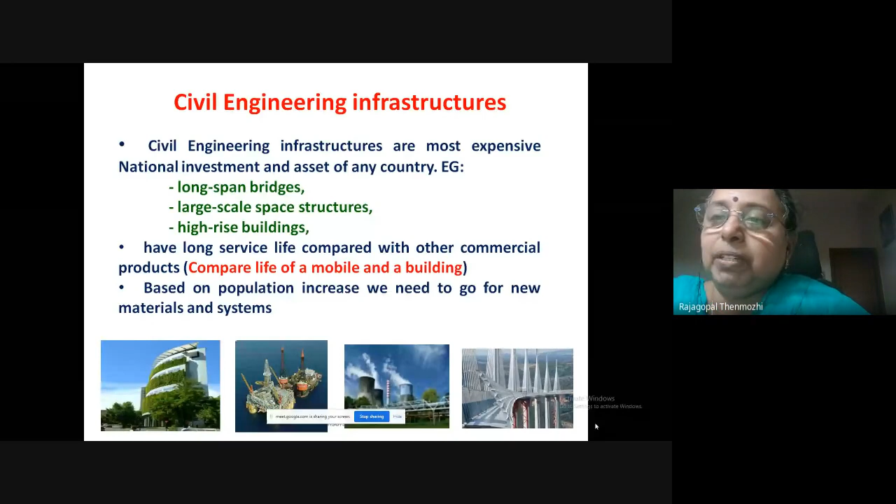So for these kinds of structures, we are having it today, and it is the need of the hour also, because, you know, compare the population of Tamil Nadu and India some 50 years back and today. Every year we are having a mushroom growth, an exponential increase in the population. So for each and every increase in population, we have to satisfy the norms for that individual. He needs a good or decent house for living.

And for that man or woman, we have to provide the roads for transport, and he needs all kinds of commercial things, and all kinds of infrastructure like road, railway, airport, and other things. And he needs the religious temple, like that. All these things we need to provide in addition to the lifeline basic services like water and electricity, etc. So these are important infrastructure needs as far as the people are concerned.

So you can just compare the life of a mobile and a building. The mobile is available from 1,000 or 2,000 onwards till lakhs, and even beyond a lakh. But you cannot construct a building for a lakh. Even one room or one component of that building is not at all possible. So we have to keenly depend on the construction activity, and we have to bother about the type of material we are choosing and the type of technology or system we are adopting, because it is going to last long.

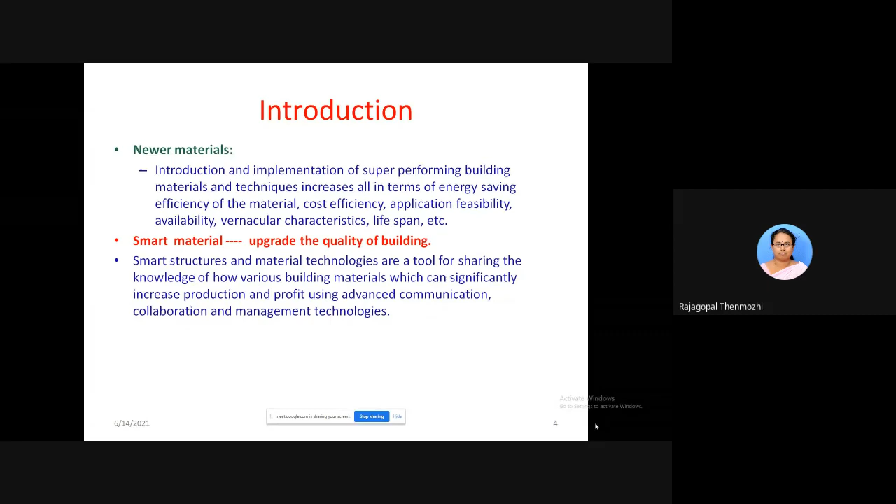So coming over to the materials side, I call these super performing materials. A super performing material is a material which can perform in these ways. It can save the overall building energy, which is the talk of the day now. That's why I have put it in green color; we always need everything in a go green manner. The second thing is you want it to be pleasant enough, so you want to make the building aesthetically pleasing.

And the engineer's vision always has one main thing, the economy point of view. We want everything in economical mode. We don't want to dump our money as a dead load in the building, so we want to cut cost in all things. And the material should be easily available, and you should not disturb nature a lot.

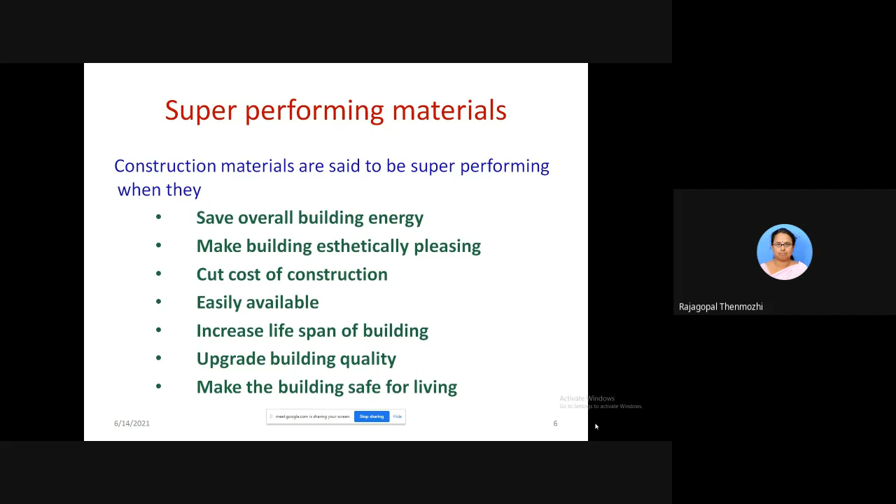At the same time, the building should survive for a long time, so its life should be more. Similarly, you should upgrade the building quality and make the building safe for living. These are the things a building material should satisfy. So in that sense, I have charted out these kinds of materials, which of course you know already. Nowadays in India these materials are in practice, but foreign countries have gone a lot further; these materials have been in practice there for the past two decades.

So we have durable concrete, because we want to expose it in certain situations to aggressive environments, and there also it should perform well. Similarly, high performance concrete. We are not going only with 2-story, 3-story or 4-story buildings. In Mumbai, Delhi or Calcutta we don't have any space, so to meet the population demand we have to go for skyscrapers or tall buildings.

If you want to construct a 40-storied or 60-storied building, your M15 or M20 grade will never do, because we want a slender construction also. If you make the grade of concrete higher, the strength will be higher, so your section will be smaller, and the load going to the foundation will also be lesser. In that case you can choose high performance concrete, not only to make a slender section but also performance wise.

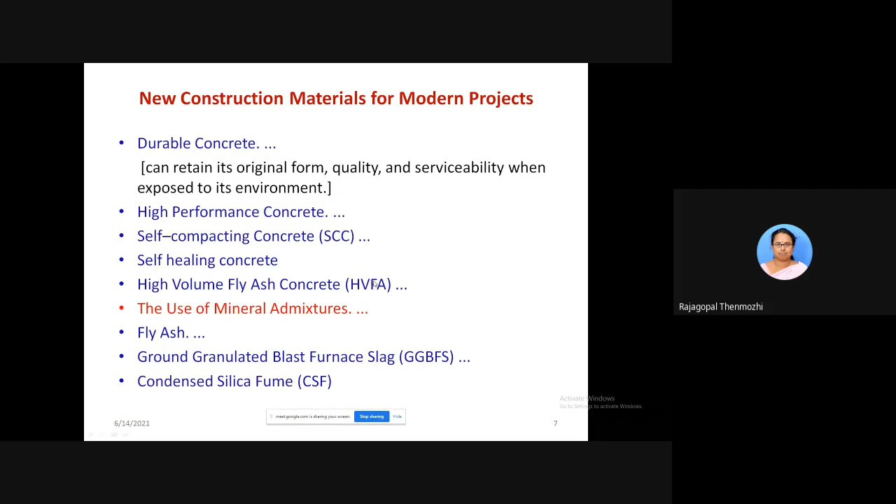So instead of using only normal RCC or normal pre-stressed concrete, people have started using these kinds of concrete in various projects to save money and to reduce the pollution. So this is what I want to mention in this slide.

In the cement and concrete industry, cement manufacturing releases 800 kg of carbon dioxide per ton of cement. Around 60% results from the chemical reaction of limestone, which everyone knows, and the balance nearly 40% is from burning of fuels, and less than 5% is from electrical energy.

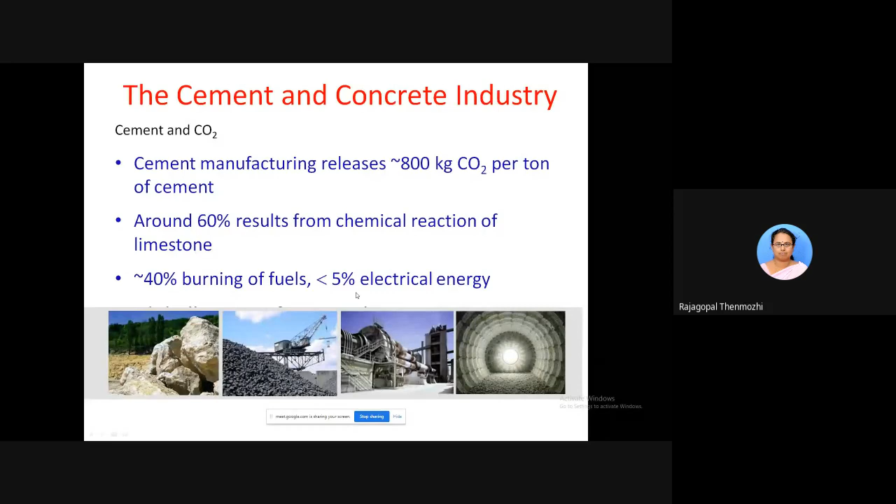So we want to replace the clinker, because clinker manufacturing alone accounts for 90% of fuel and energy consumption, which leads to heavy emissions also. This can be partly substituted by latent hydraulic or pozzolanic materials like blast furnace slag from the steel industry, fly ash from coal-fired power plants, and natural and artificial pozzolans.

There are so many pozzolanic binders from waste materials people have started using, which you may also know about. All the participants, I hope, are faculty members, so you may be guiding projects for 8th semester or PG students using supplementary cementitious materials. There is a wide range of composite cements covered by the European standards.

So what I would like to conclude is there are three main pathways successfully applied in the cement industry, enabled through R&D and innovations in engineering technology and material science, because we should know the physics and chemistry of supplementary cementitious materials. Based on that, so many materials have evolved.

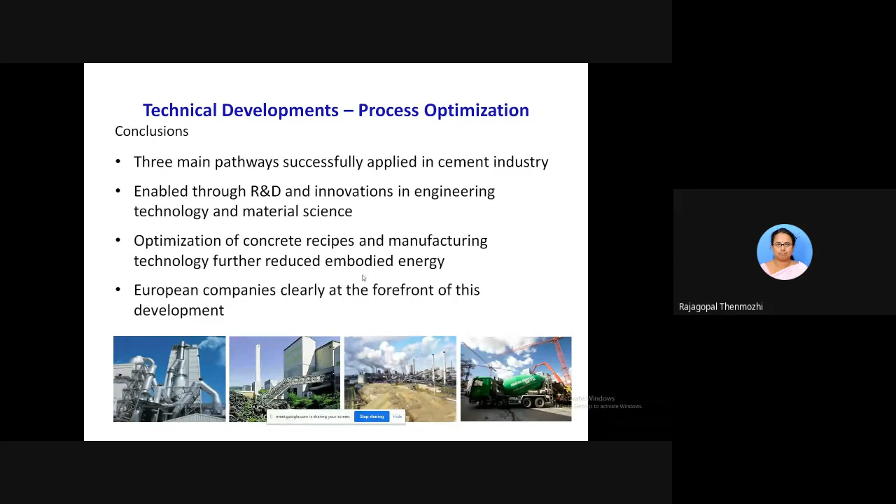So based on that, we have got these kinds of different types of concrete: fly ash concrete, high volume fly ash concrete, geopolymer concrete, bagasse ash concrete, rubberized concrete. Like that, there are so many sustainable concretes using the wastage materials from different industries. We are making it as a supplementary for the binders. Partly we are replacing for a binder, right? So that the cement consumption may be lesser. Once cement consumption is lesser, we can save the cement, we can reduce the cement production also.

Yes. So as a second material, right? In these slides I have mentioned about the concrete which is based on the different kinds of materials. So fly ash is the industrial waste, and fly ash concrete, high volume fly ash concrete, and geopolymer concrete, all these things can be based on the industrial waste fly ash. And bagasse ash is nothing but the sugarcane waste, right? So you will just crush it and you have to burn it, and that ash can be used for the replacement of cement. There are many researches going on using this bagasse ash.

And similarly, rubberized concrete. You can find a lot of materials are available as far as the rubbers are concerned, right? Literally, see in a town, how many vehicles are passing? Can you please think of it? If you just see the town hall area in a bird's eye view manner, there are so many four-wheelers and two-wheelers daily traveling. Of course, avoid this lockdown period. In the festive season or other seasons we are seeing so many vehicles. So just think of the life of the wheels of the vehicle. Can it go for 50 years or 60 years or till your life ends? No, not at all. So it has a limited lifespan.

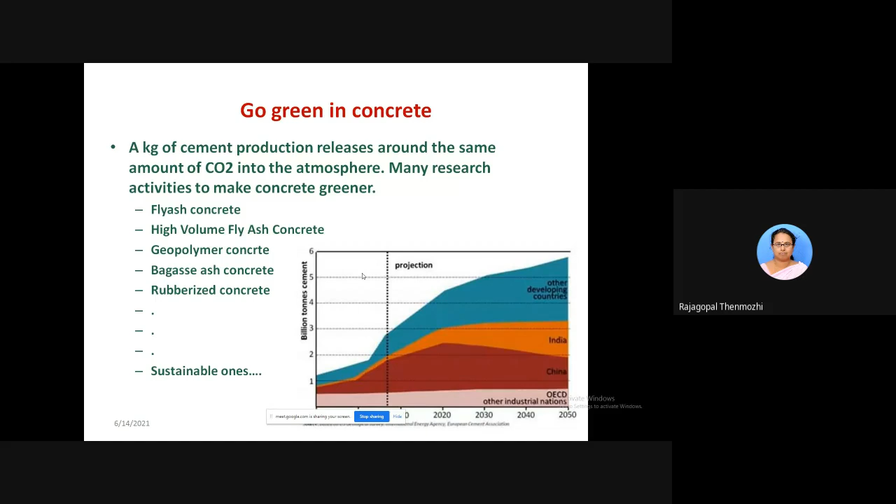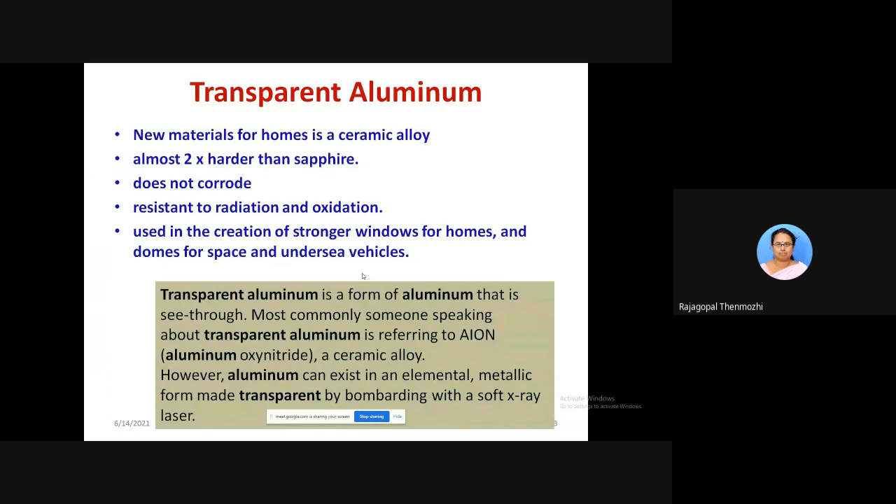And what are the other materials you have in the world? Coming over to the next one, the transparent aluminum. Many of you might have heard about this also. It is nothing but a ceramic alloy. It is a form of aluminum only. It is transparent, as the name indicates, a see-through one. It is almost two times harder than sapphire, it has no corrosion, and it can resist more radiation and oxidation also. This kind of aluminum can be best utilized in the creation of stronger windows for homes, domes for space elements, and undersea vehicles. There are so many space construction elements, and for those you could utilize this, as it is strong enough to act as the member there.

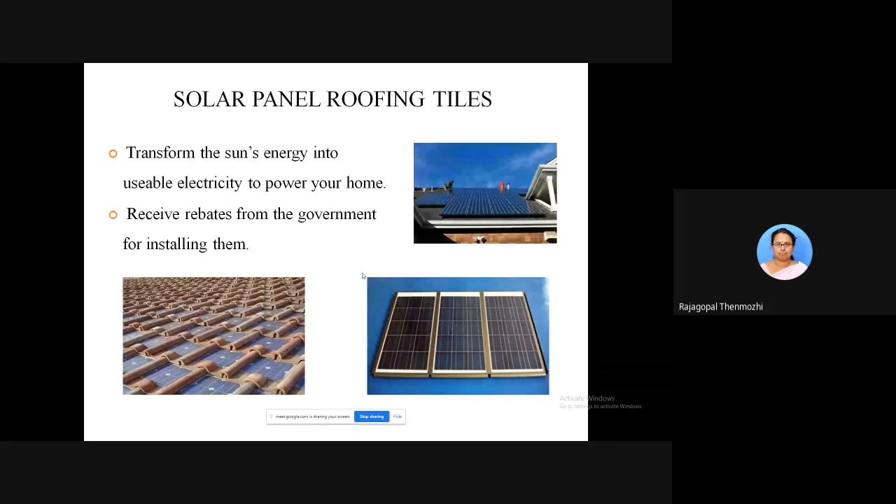And either you can utilize that for pumping, for your water heater, or somewhere else. That is a different thing. But now the tiles themselves have been manufactured using this kind of system, in the same way as the solar street lamps you are seeing in the streets.

And another thing is CLT, which is nothing but cross-laminated timber. Right? So, of course, 3 to 11 wooden layers will be there. CLT can consist of many wooden layers which are glued together to form a solid panel. Its thickness normally varies from 50 to 300, say 60 to 320 mm, something like that.

And it is normally used mainly for low-rise residential buildings and commercial complexes, and for mixed applications also, say for temple-like structures and other buildings. But now, you may wonder, it has started to find applications in the construction of tall buildings and skyscrapers in foreign countries, because it is a sustainable and resilient form of engineered wood.

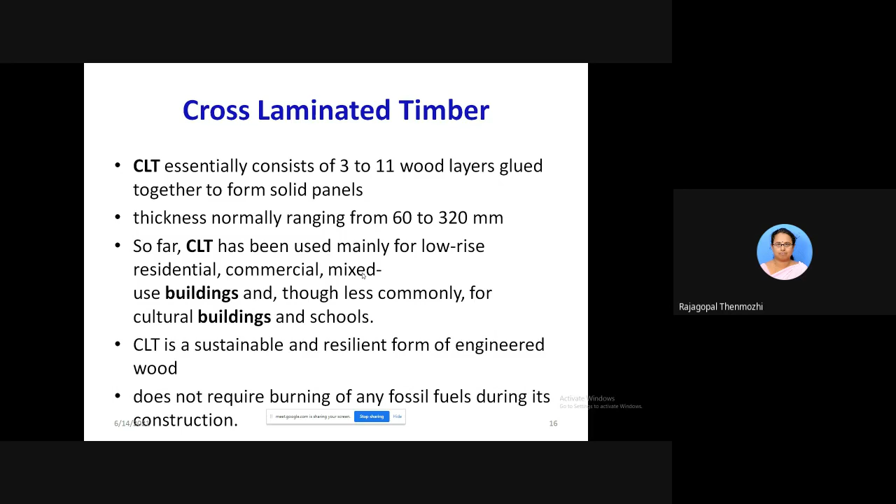Suppose you take Japan or other countries which are quite often subjected to earthquakes. In those places you may find more wooden construction, so in those areas this may find more application. And this does not require burning of any fossil fuels during its construction.

Of course, the initial cost will be higher, but the final overall cost will be lesser, so you could save something. Because of its natural-looking aesthetics and strength, designers and builders are now coming up with the usage of CLT even for tall buildings. The architects have started to use it a lot.

And see, this is one example of CLT. This is a 34-meter long and 3-meter wide upside-down double cantilever structure. The wonder is that it is a double cantilever structure. This is a public art pavilion at Chelsea College in London.

Ma'am? Yes. I'm sorry for disturbing you, ma'am. In your slide you're showing a small dialog box. Please press the hide button, it's in the lower corner. Some topics are not showing. Please press your hide button. Okay, this one? Yes, ma'am. Okay. Please proceed, ma'am.

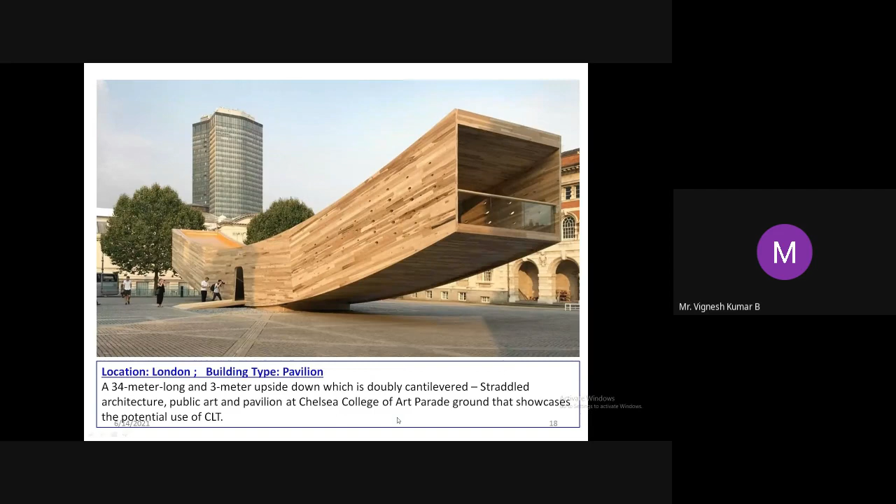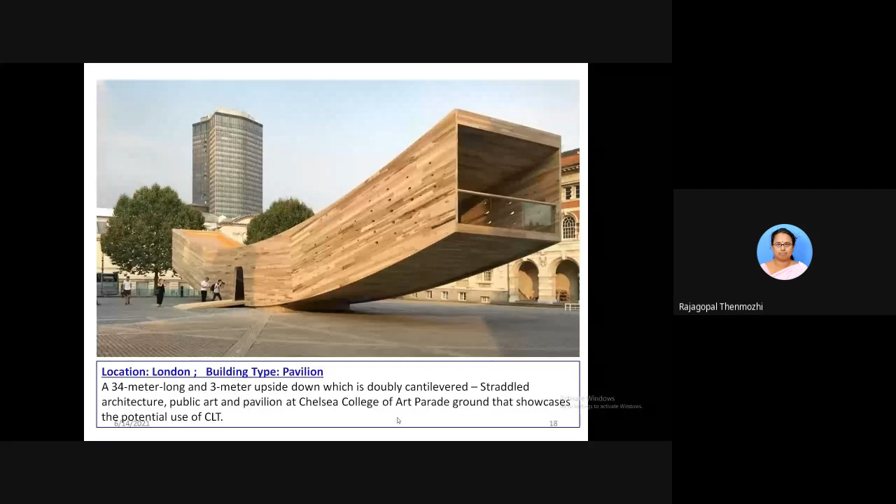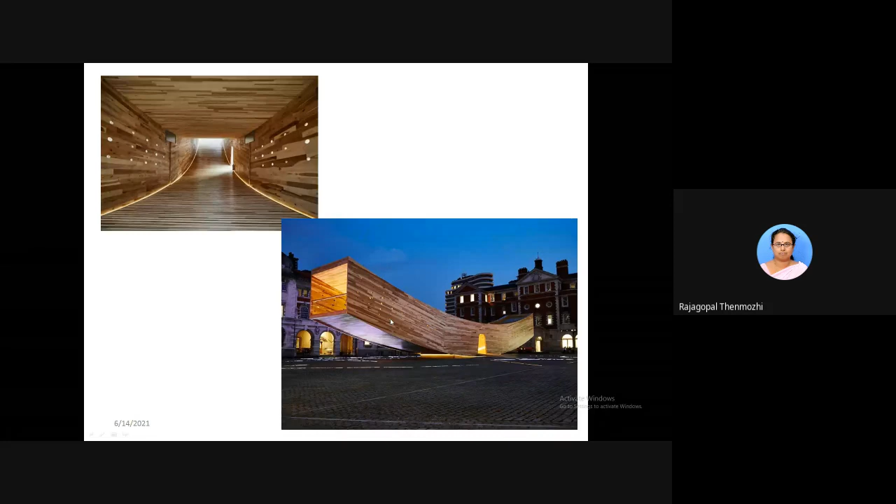Okay, so this is one example, this pavilion building, a double cantilever building made completely of CLT. And this is another view of the same structure. The first one is the inner view of the cantilevered structure, and this is the entire structural element, shown in a photo taken from another angle.

And of course, many of you know about rammed earth, because in villages many constructions use it. Nowadays some foreign countries, where rammed earth is available a lot, have this kind of construction. Normally they compress it in wooden boxes, and it is compressed in layers of earth, sand, clay, and fiber.

So how is this made? The solid material is filled with pores, up to 90-95% of the volume can be voids. It can consist of gas-filled voids in two different kinds of structure: either stochastic/reticulated, or regular stacked cell. Depending on the density, structure, and shapes of the cavities, this can be divided into two types - the stochastic form and the regular form.

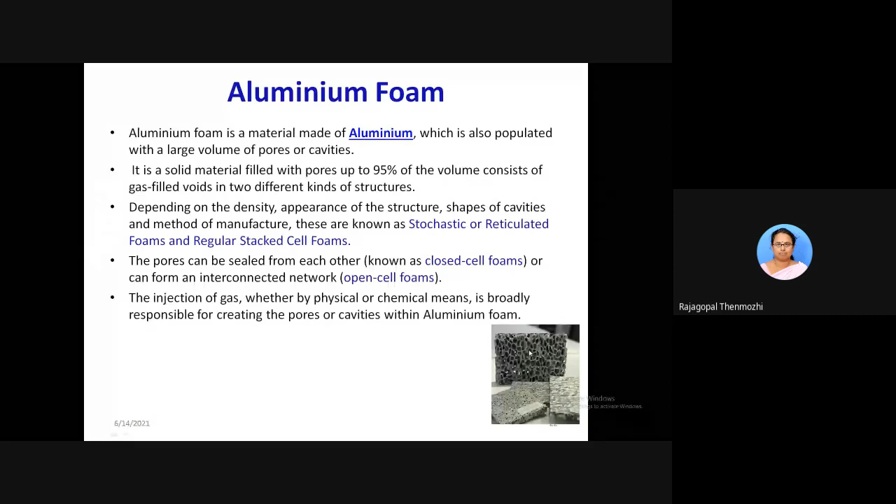So it is really a wonderful and excellent material which can deform in a lesser way alone. These are the different properties of aluminum foam - it is extremely durable and very lightweight. You can see there are so many voids around, and these voids are filled up by gas cells, giving it a very large surface area to volume ratio.

This non-flammable material inherits all these excellent properties. Aluminum, which we use in the kitchen, has a large secondary value because it can be recycled, so aluminum foam can also be recyclable. It has good heat and corrosion resistance, and huge strength because of the air gap voids filled by gases, which together as a foam element gives much strength.

Fortunately, the electrical and thermal conductivity of the foam is good, and the weight is very lesser - because of the weight of aluminum combined with that foam structure, it's only a fraction. It also has a high specific stiffness, that's why it can withstand greater damage with very little deformation.

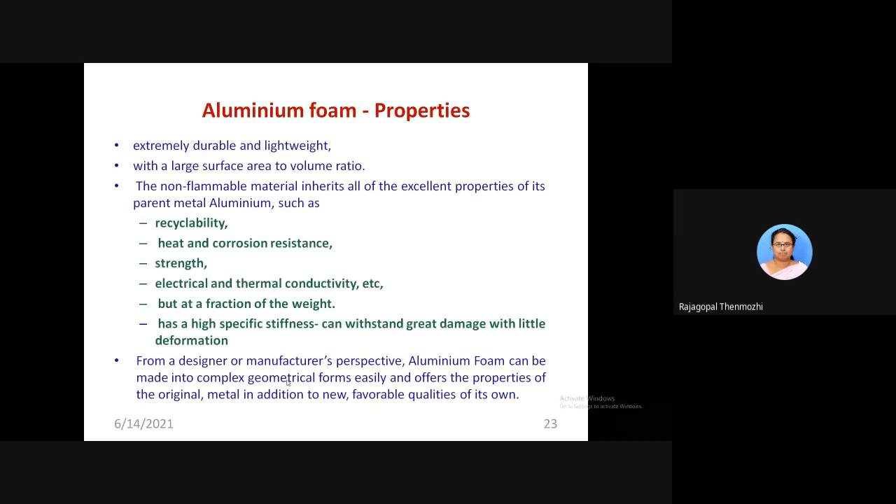From the designer's or manufacturer's point of view, aluminum foam can be made into a complex form, any kind of geometry easily, and it offers good properties, making it favorable for the construction industry. Many industries utilize this aluminum foam, like automotive, aerospace, and construction.

The automotive industry uses it for good impact, acoustic, and vibration absorption. In the aerospace industry, people use it for making turbine components or spatial cones. As far as our industry is concerned, since this material is fireproof and heat-proof, it serves as a structural and protective barrier against explosions or heavy sound, as well as in the naval industry.

This plays a vital role in shades and shadows, bringing identity to the structure. A number of automotive and aircraft manufacturers consistently utilize this aluminum foam mainly because it has a good high strength to weight ratio.

Strength to weight ratio is very, very large because the weight is very, very lesser. So it has a very good amount of high strength. So automatically the weight going to the foundation will be very, very lesser.

So utilizing this aluminum foam, you can make it into a column also. People have started this as one research area. You are having a tubular hollow formed steel or mild steel element, in which you can pour this aluminum foam, and you could find the value of the column element, how much load it can take.

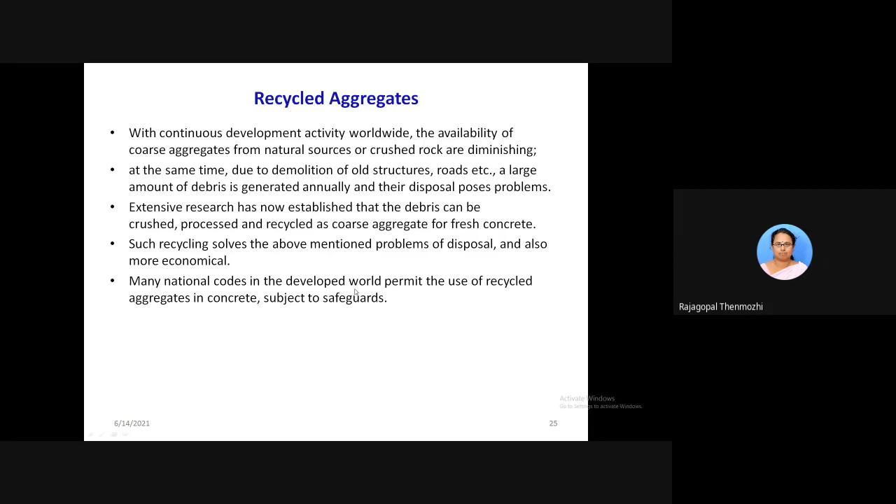And the other type of aggregate is the lightweight aggregate. I hope you also heard of this one. Because nowadays, if we are just depleting all the natural resources, in a short duration everything will be gone, and we will not be in a condition to get all these things. So in such a case, we have to go for man-made aggregates. Man-made aggregates, in the sense, there are a lot of waste materials or industrial wastes available.

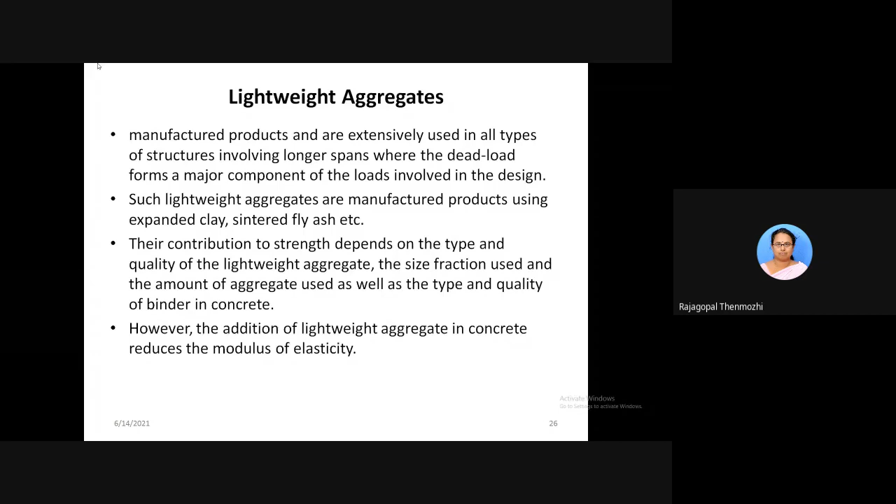From industrial waste, you could manufacture lightweight aggregate. If you're making an aggregate that gives you lightweight, automatically the load on the foundation is lesser, so you save material and make the structure more economical. Such lightweight aggregates include sintered fly ash aggregate using fly ash, and expanded clay using clay. There are so many other industrial wastes too, giving you many lightweight aggregates used in practice.

So what we've seen are certain materials. I just want to throw light on this: workshops like this will not give you the entire knowledge about the system. Through these kinds of programs, you get to know the title or some information about it, but it should be your interest to get more knowledge about the thing, so that afterward you can Google it and find out more about whichever system you want to know more about.

Coming over to innovative construction systems, there are a lot of things available. I just want to mention 7 different systems: self-healing concrete, 3D printing, diagrid structures, outriggers in super tall buildings, photovoltaic glazings, modular construction, and cloud collaboration. How many of you know about these words?

Of course, many of you know about self-healing and 3D printing, am I right? Please... Any answers? Have you heard of these words? If you're replying something, then I could understand something.

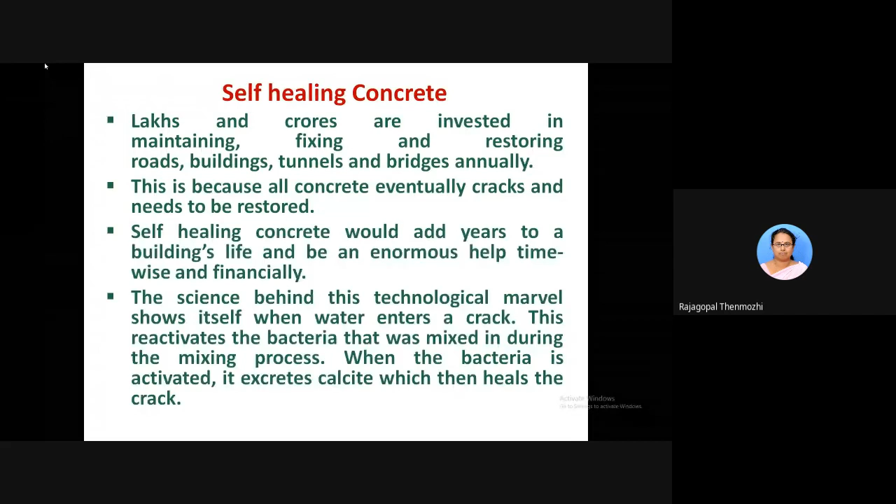The science behind this technological marvel is that when water enters a crack, it reactivates the bacteria mixed with the concrete during the mixing period itself. When the bacteria is activated, it excretes calcite, which then heals the crack. So this is how the mechanism works—the concrete is engineered with water-activated bacteria, which heal the crack by producing calcite.

So self-healing concrete is saving contractors and engineers a lot of time and labor. By using this type of concrete, you reduce infrastructure maintenance and reduce the production of greenhouse gases, which everyone knows. Simply put, the structures can last for 200 years—2 centuries it can go.

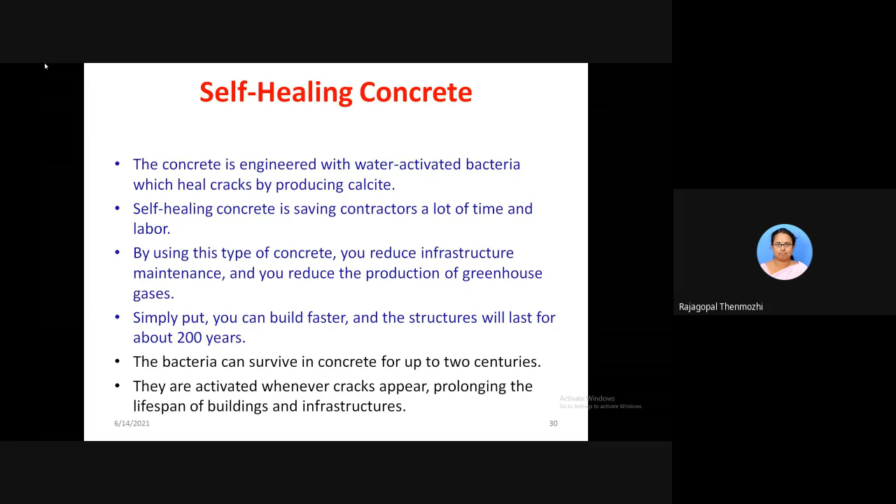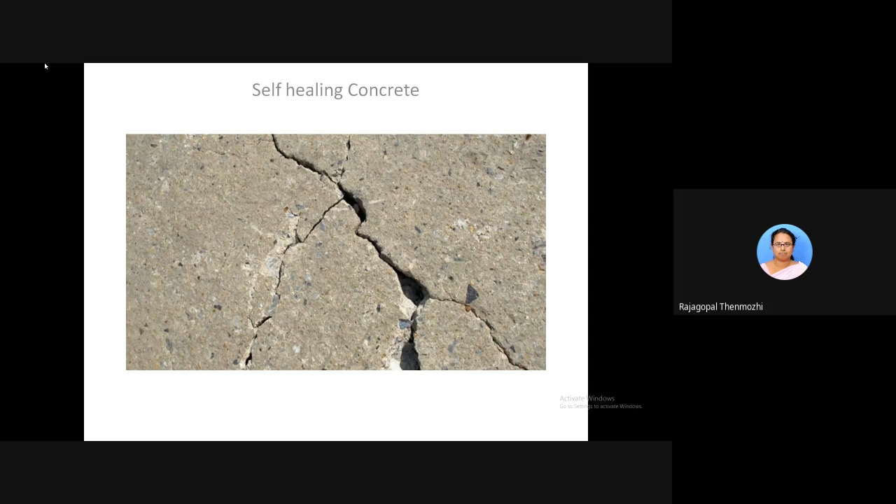So they are activated whenever the cracks appear, prolonging the lifespan of infrastructure. This is the way self-healing concrete works. Right? So these kinds of cracks we do not want to see, right? So once it opens, it just triggers. Up to this kind of width we need not permit, right? So if it just started to show a micro crack itself, this bacteria will just open up and it will excrete the calcite, so it will automatically close. So that will be the job of the self-healing concrete if you are using it.

Yes, coming over to the 3D printing. 3D printers everyone knows, right? It is the talk of the day. This is used in construction to create components or structural elements, printing directly at the site, just as printing technology is used in mechanical production or other machinery production everywhere.

Suppose you just take a vessel in your house, a kitchen vessel, simply a plate or spoon, how they are manufactured. The similar way your house is going to be built. Similar way you are going to manufacture your house. In the same way you are going to print your building. So that's called 3D printing.

That machine is normally housed within the industry itself, but this machine will have a large arm and other kinds of machines, many robots. So the machinery itself is a huge thing. And today we have all the design process intact, everything given in soft form. And the industry is also experienced in computer-aided manufacturing for the past 2 decades. And there are so many advancements, like building information modeling, which further facilitate greater use. So 3D printing construction may allow faster and more accurate construction.

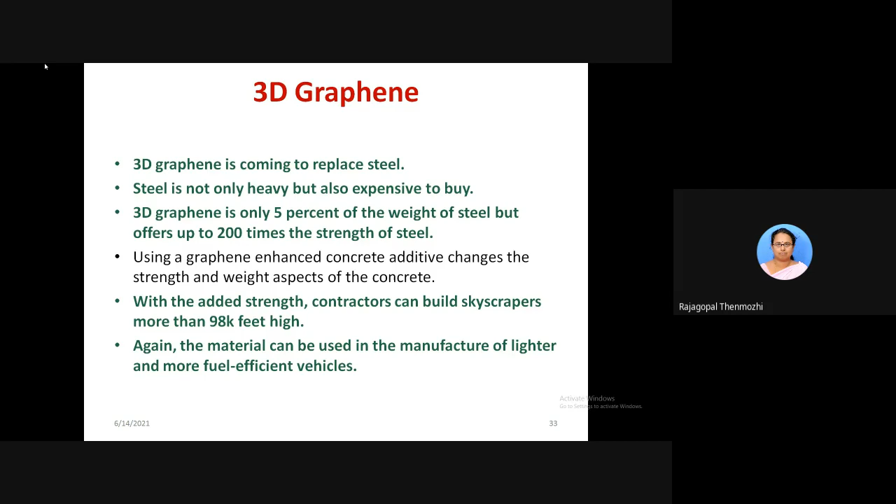With this added strength, contractors could build skyscrapers even 98,000 feet high. The material can also be used to manufacture lighter and more fuel-efficient vehicles. Nowadays graphene is used in 3D printing concrete, and we have mobile 3D printers. Adding graphene to a material makes it stronger, durable, lighter, more elastic, and resistant to cracks. This improves the antibacterial and thermal properties of the material.

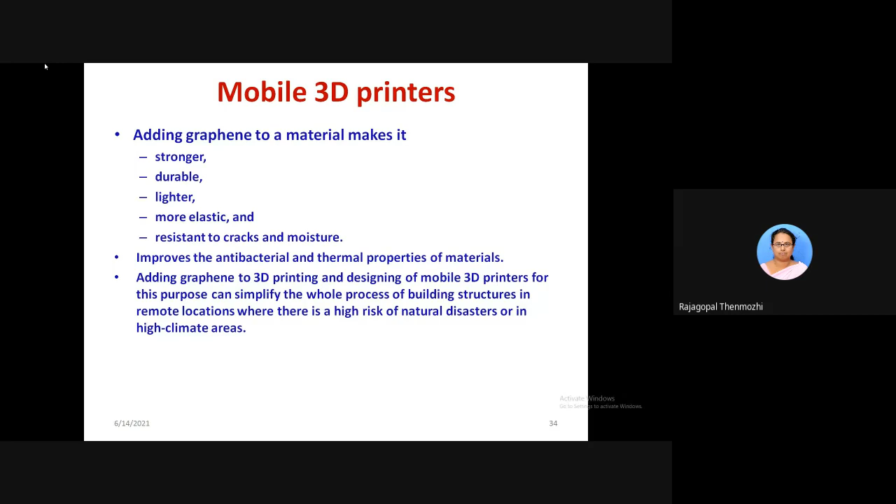So adding graphene to 3D printing and designing mobile 3D printers for this purpose can simplify the entire process of building structures in remote locations with heavy risk from natural disasters and in harsh climate areas. So these are the benefits. Aside from the environmental benefits of 3D printing, there are other advantages we get from this material.

Mainly it saves time and labor. If you want to do a particular job in 2 weeks time, that can be finished within 3 to 4 days itself. So see how much time you are saving. On top of that, the risk of injury on site dramatically drops.

Someone is asking what the main topic for today's session is, ma'am. So I only posted. Which one? Who is that participant? What is your question here? So it's Muhammad sir. I think Muhammad sir is asking the question, ma'am. So what is the main topic? Yeah, the topic is innovative concrete materials and systems. Yes, what is the doubt you have, Muhammad Ashfaq Khan? So if you have any queries, you can post.

And my topic here is innovative concrete materials and systems, because these are new areas of research which are not yet completed but have come into existence in practice in other countries. Okay, that's what I am talking about. There are so many research avenues, because we do not yet have the codal provision for this 3D concrete printing. And we are using only concrete. There are a lot of materials that can be used for that. So whenever you are using another material, we need supportive information through R&D. Once the R&D is completed, only then can we have the codal provision, and then we can use it in a proper manner.

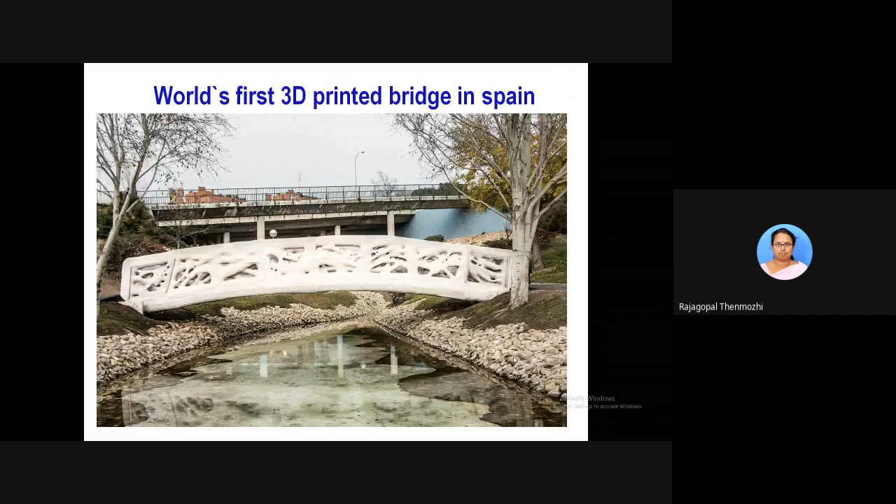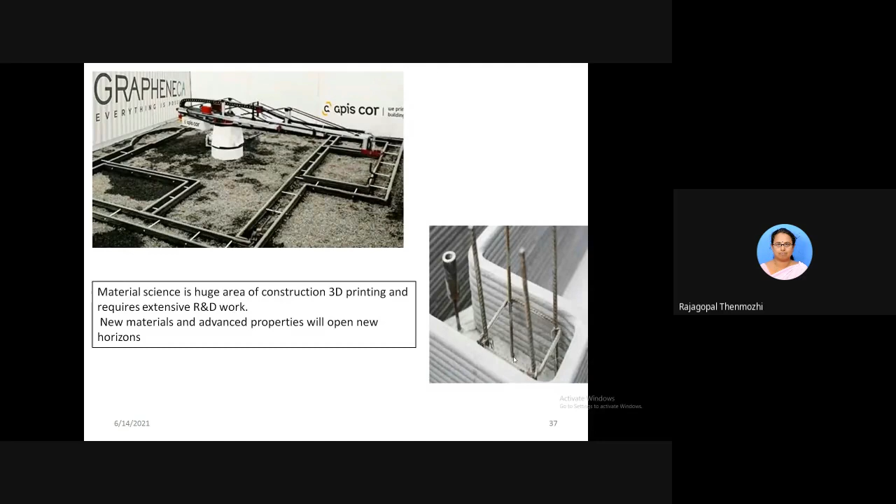And this is the world's first 3D printed bridge in Spain. Some of you may have heard of it. A very nice bridge, directly printed and erected at site. And this is how people will do it. Material science is a huge area; a lot of physics and chemistry should be learned. Automatically the lever arm will pour the concrete, and the house will be readily built. So that is the discussion about the 3D printed concrete system.

So recently, the use of perimeter diagonals: in layman's words, you are not going to provide vertical columns in the periphery; instead they will be connected diagonally. If you connect them diagonally, we call such a system a diagonal grid, so it is a diagrid. That's how the name comes. This structure is made up of diamond modules with diagonal members and provides more lateral stiffness. Can you think of how, instead of a vertical column, an inclined column can give more stiffness? Can any of you comment on this?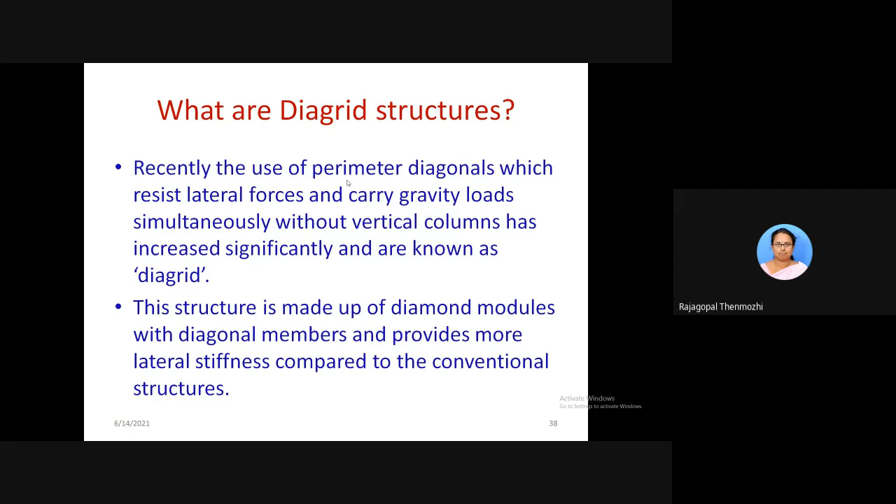Same structure, you model it through one of your students, right? Say for the next semester, 8th semester students, you can give a project, either a G+5 or G+10-storied building. One is based on RCC with regular conventional type of construction. And the same thing you ask him to design by means of the diagrid. So how much material you are going to save there, you can judge. Definitely there will be an economical benefit of it.

And also this gives a pleasing appearance. So do you agree or not? Definitely, no? So instead of seeing the regular rectangular columns, this gives a good look, right? So high-rise buildings using diagrid structures are a trend today.

There are so many kinds of lateral load resisting systems for high-rise buildings, right? They are rigid frame, shear wall frame, braced tube system, outrigger systems, and tubes. Okay, so these are the various systems available, and recently this kind of diagrid structural system is adopted in tall buildings due to the structural efficiency and flexibility in architectural plan.

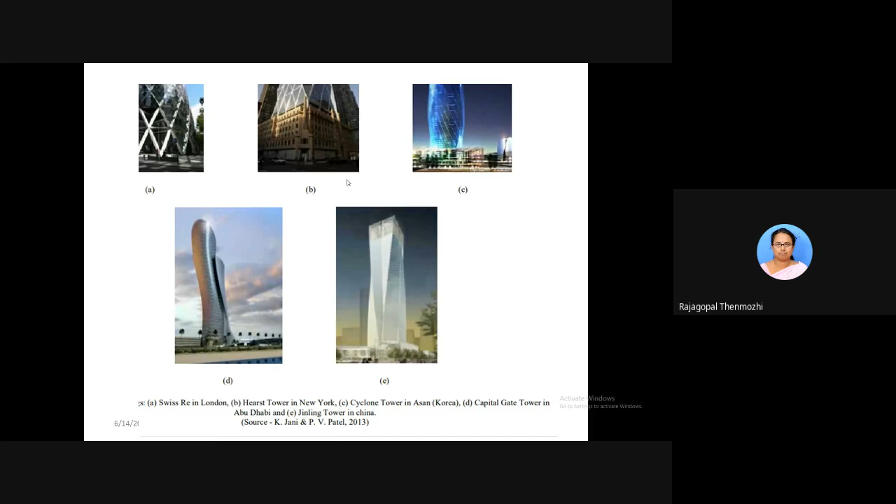This is one project for your final year students. Okay. Using a finite element approach in ETABS, that will be good, or even you can use STAAD Pro itself, right? Yes. So this is an example: a building in London designed using this kind of diagrid. And these are the other systems. There are so many places these kinds of buildings are available today, in Abu Dhabi, London, China, right? Everywhere.

So to avoid that, to disperse it, what people are doing now is, every 15th or 20th story, one big beam is provided. Outrigger is nothing but a very stiff beam, right? So that will be provided. The height of this outrigger beam may be up to 1 meter or even 1.5 meters. So the load from all these beams above will be taken care of by this heavy truss, right?

So for the remaining beams, you are able to reduce the size of the regular beam. See, in a 100-story building, you will have 100 regular beams. Suppose you are considering only one single frame, a 2D frame, right? So the weight of 100 beams may be much simplified, right?

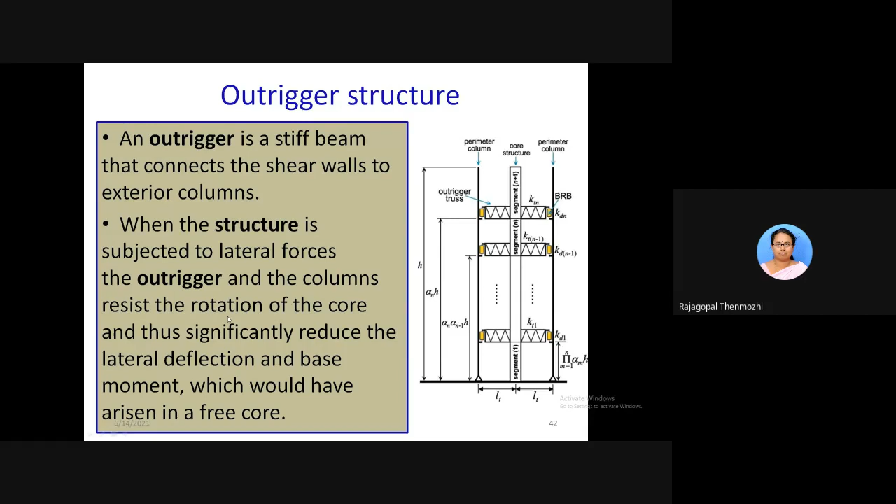So this is another picture. See here, these are the outrigger systems adopted in super tall buildings, right? So this is one outrigger, this is one outrigger. The lateral load resisted by a conventional building will be much higher. So by adopting this kind of system, these lateral loads can be taken care of by this particular element. So like that, you could see.

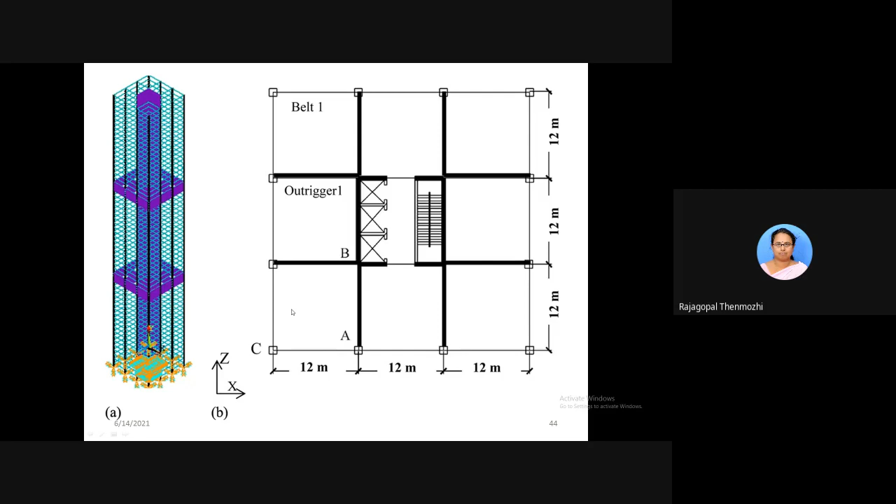Right? So this is the pictorial view of a 3D frame. At every 20th floor, one outrigger is placed here. So this is nothing but outrigger 1, outrigger 2. So this can take care of all the lateral and seismic loads and other kinds, so that the size of the beams in a 100-story building will be reduced.

So this is another picture which shows another outrigger. This could be either a steel-based truss or a composite truss or a heavy RC member in which a composite I-beam may be placed. So maybe you can also give this to your students as a project, so that you could also learn and the students could also develop this knowledge, right?

So you can ask them to provide a beam here using a steel truss, another using a concrete-encased composite structure, within which you provide a truss surrounded by concrete, and another one an RC beam with a laced and battened system as reinforcement. These three can be analyzed, and you can compare the cost of the building, the size and weight of the structure, the optimum weight of steel in each system. So all those are nice choices for a project.

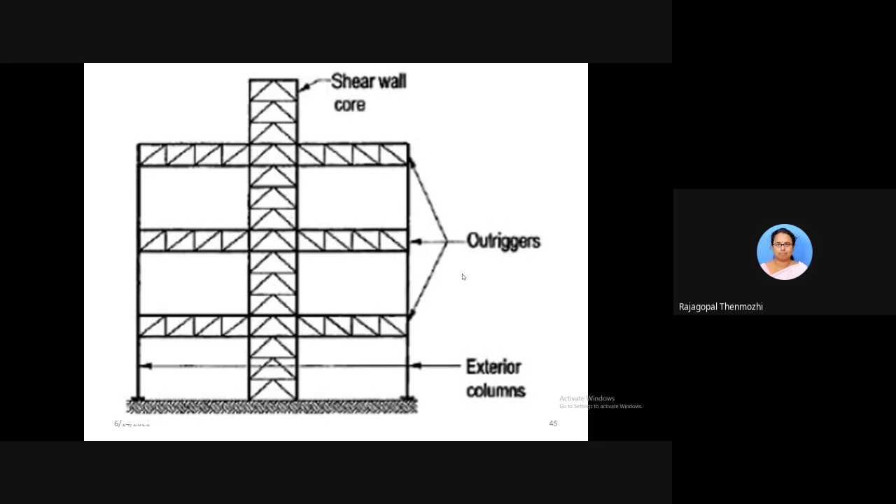This is also another eye opener from a research point of view. Not much research has gone on in these cases. This is again another picture which shows the outrigger trusses, or another way you can call this a belt.

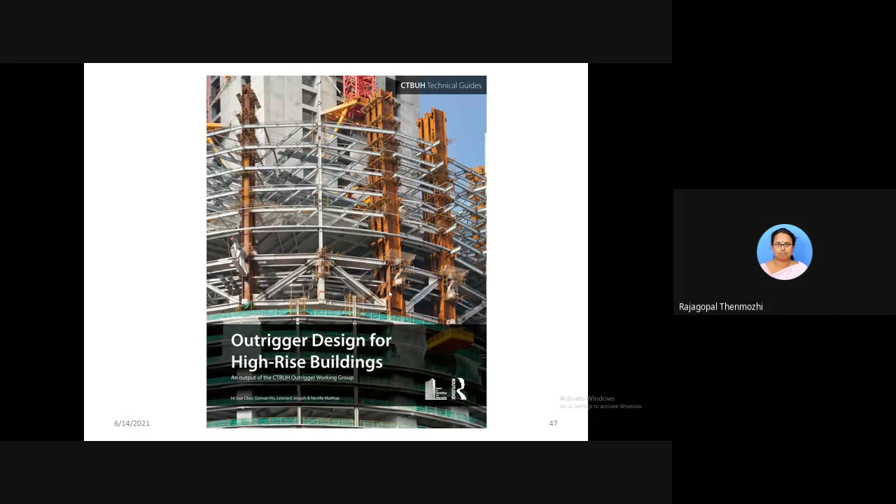This is again a real case of outrigger design for high-rise buildings. See, these are all smaller steel beams. This is the steel column, right? So here, this one is the outrigger. It is a kind of truss element, right? So your saving will be done there, right? So that completes my discussion about the outriggers.

So the next material is the photovoltaic glaze. Has anybody of you heard of this word, photovoltaic glaze? This is nothing but a building integrated with photovoltaic glazing, BIPV, right? What it does is generate electricity on its own. You wonder? Definitely, yeah. Some companies are manufacturing these kinds of glasses for windows, facades, and roofs, right?

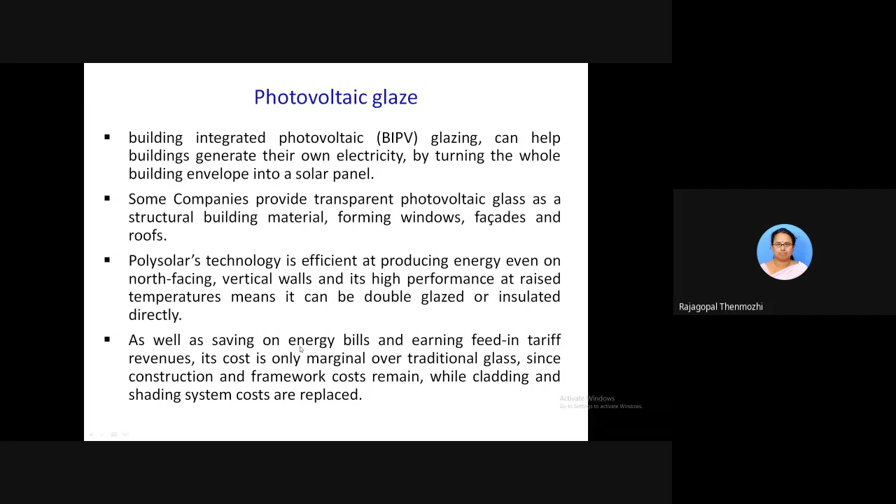Polysolar's technology is efficient at producing energy even on north-facing vertical walls, and its high performance at raised temperatures means it can be double glazed or insulated directly, right? As well as saving energy, you can save on the EB bill here. So how is it done? This is an example of a system. In foreign countries they have this kind of system. So BIPV acts as an enabler to adopt solar energy, right?

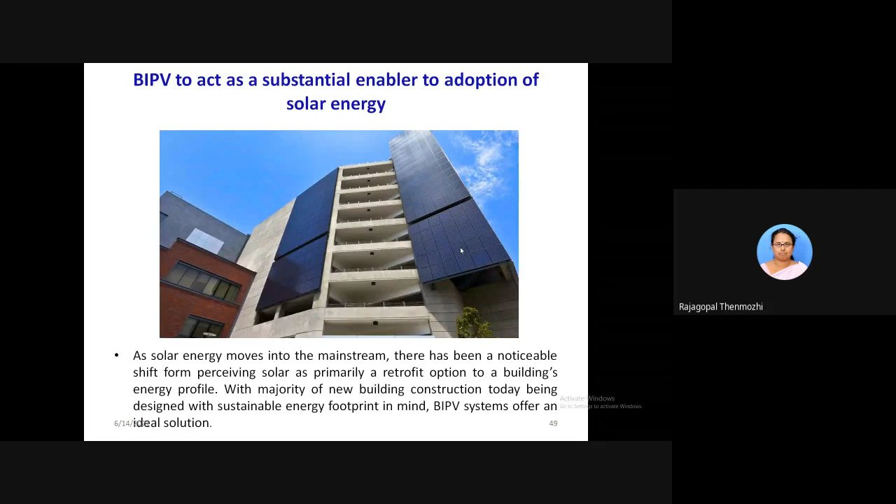And this is again another pictorial view. See, from the sun, these kinds of photovoltaic panels are fixed over the building roof, or glazing, or over the wall facade, anywhere, right? So this can absorb the energy, and it can convert it into AC or DC, and send it to the AC or DC inverter, right?

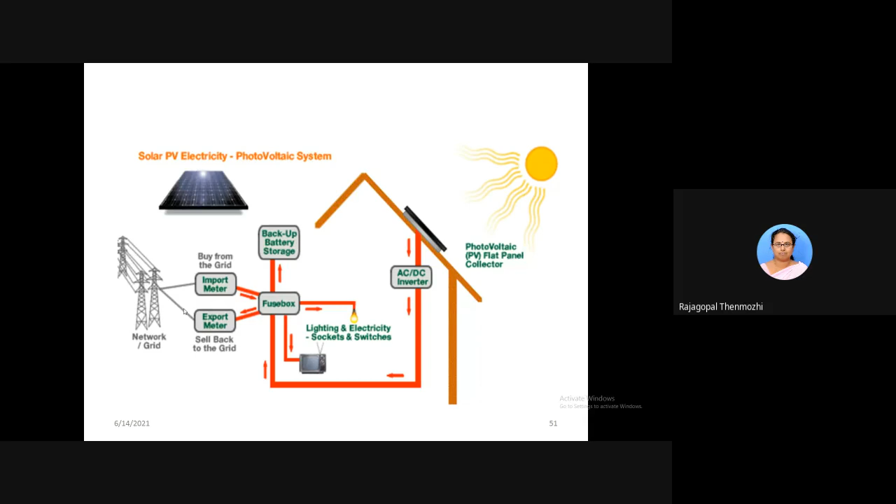So from there it can go to the fuse box, it can take backup from the battery storage, and the import meter and export meter, and it can send to the grid. So whenever and wherever needed, again it can go back, and the building can consume the light, and it can store wherever needed. This is the proper system, so that our electrical energy is not wasted. So these are again other examples of such buildings.

Right? So they can make whatever your requirements are, the size of the beam, the size of the column, the size of the staircase, each flight can be constructed, and each roof panel can be built and cast, and it can be sent to the site. Right? So of course 70 to 80% of your building may be fabricated as individual elements in the industry. It will be manufactured, and it can be brought to the site, and within days or so, they can be connected. Right?

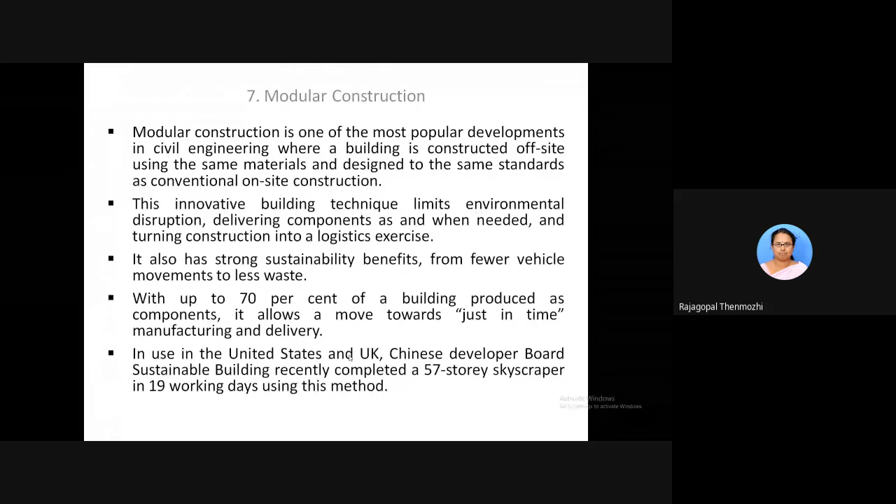So for the connectivity, they want to make it monolithic, no? So for which, in those connection areas alone, they have to use the concrete. Okay. So like this, one very great example here is a 57-story skyscraper constructed in 19 working days. Wonderful, no? In the United States and UK, they have built like that. Okay. So this kind of modular construction is there.

So here also in IIT, one of the buildings, many of you might have heard, gypsum board, right? Using gypsum board, they have done one G plus 2 story building, I think, right? So that was constructed in 1 month or so. So that video is available on their website also. So this kind of work is going on. So that is again another novelty.

And also what we can do now in our research is the materials they are using, this kind of board, no? So nowadays people have started using various industrial wastes to make these kinds of panel boards, right? So that is one novel approach here. You need not utilize the cement as a binder entirely. Instead of using it 100%, you can replace it by 50% or even less, by using economical industrial waste, right? So the materials which have to be disposed of can be effectively utilized for making this kind of modular construction, roof panels or wall panels or whatever. So that is again another good research area.

And also the connections. Connections are very, very important. In those connection areas, not much research is available. Right. So this is again another interesting thing. And nowadays, the talk of the day in all branches of engineering is cloud computing. Now we are having MTech programs available, ME cloud computing and all. So people thought of introducing it as a branch of study.

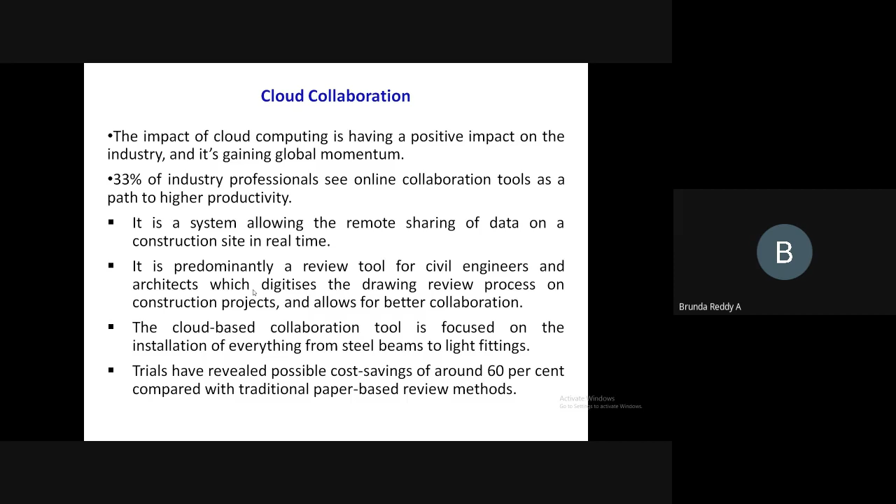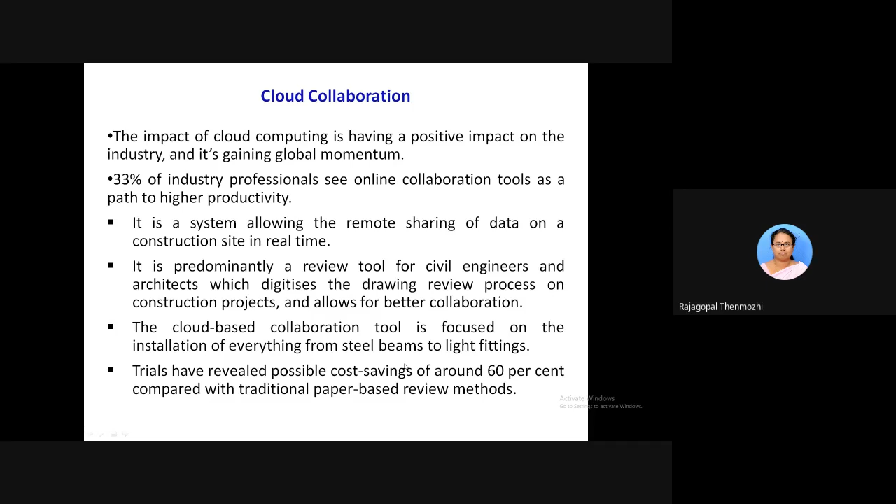The trials have revealed possible cost savings of around 60% because paper-based work is now reduced. Another way to explain this is everything is now a BIM modeled project - Building Information Modeling system. Those BIM modeled projects cannot be printed in paper format; they can be visualized as 3D using the system alone. So in that concept too, cloud collaboration will make good progress.

Cloud-based tools designed specifically for AEC professionals support your workflows, project needs, and file types. These tools support the specific scheduling and collaboration processes which help your teams develop deliverables efficiently and effectively. These tools are designed to let teams use your CAD model and model-based design files in the office or from their own location.

Wherever you are, cloud collaboration can help you address compatibility issues in several ways. You can view many native file types directly through cloud-based systems. So you're spending less time on everything, with a reduced need for paper and pens.

This is how the concept of an AEC forum works here - the architect, civil engineer, and structural engineer. The things will be stored here. If you want to add any discipline or any subpages, you can add them, and the data can be retrieved from anywhere, anytime, and the performance can be monitored everywhere.

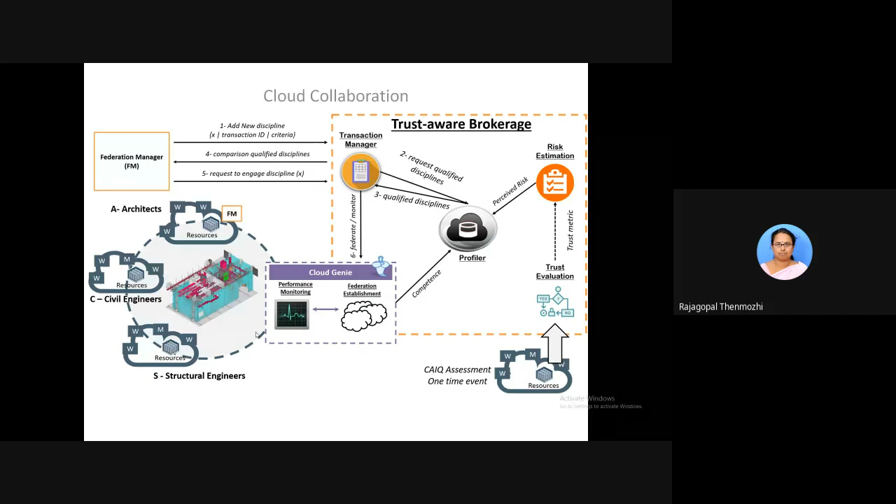After that, there are a lot of systems I have mentioned - some super performing materials which have been used in practice and which also need further research. Many of these things are used by foreign countries, and some of the systems I've mentioned also need further research. Now, what I am going to present is based on our own research conducted at Government College of Technology, Coimbatore.

Nowadays the talk is about composite systems. We are not happy with only steel and only concrete, but if it is merged - if you produce a composite element - that leads to economical construction.

Above the neutral axis, the system will be in compression, and for that compression element you need concrete. That concrete could be plain cement concrete, SCC, lightweight concrete, geopolymer concrete, high volume fly ash, or so many other things - you have so many different kinds of waste material inclusion possible. Any one type of concrete could be used.

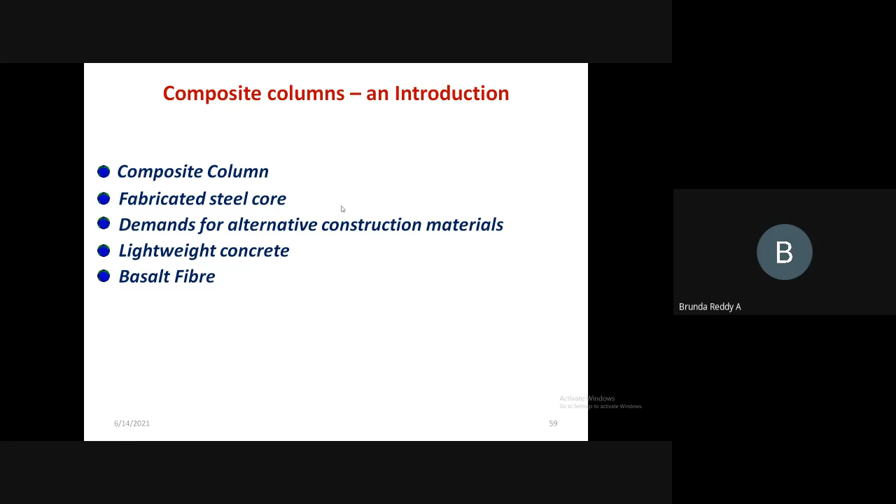There are two builder friendly construction materials: steel and concrete. Steel acts as a nerve to a human being, because without nerves we cannot stand, and similarly without steel a building cannot exist. In this composite element, the benefits of concrete and the benefits of steel are taken beautifully and combined to produce a new element called the composite system.

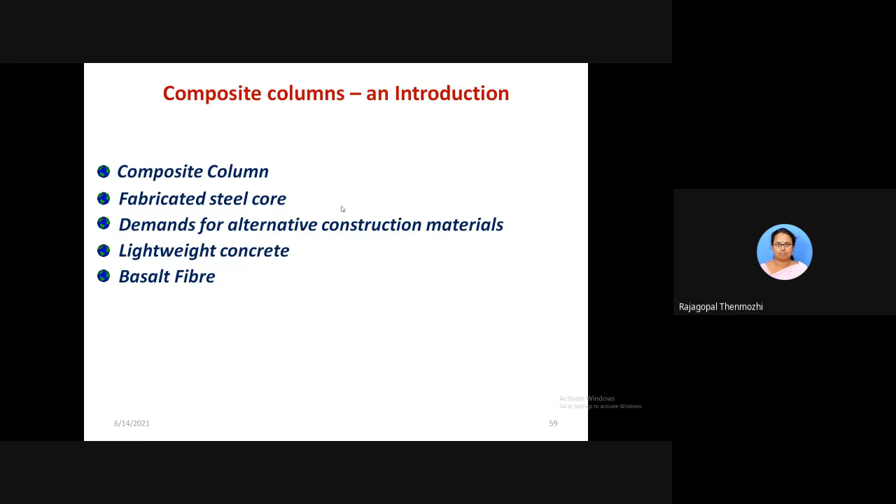This system is available for slab, beam, column, everywhere. What we have taken here is this composite column is made up of lightweight concrete, using basalt fibers. So the system will be like this.

For developing this kind of lightweight concrete, we have used systems wherein steel rods are used, and for making the concrete, sintered fly ash aggregates have been partially replaced. We have also used the lace and batten system as a shear stirrup. So these are the different models.

This is an L angle used as the main steel, and here a rounded steel rod is used. These L angles are connected by lacings in certain systems and as battens in certain systems. Everywhere we have used sintered fly ash aggregate concrete, and the load taken by axial loading and cyclic loading was studied.

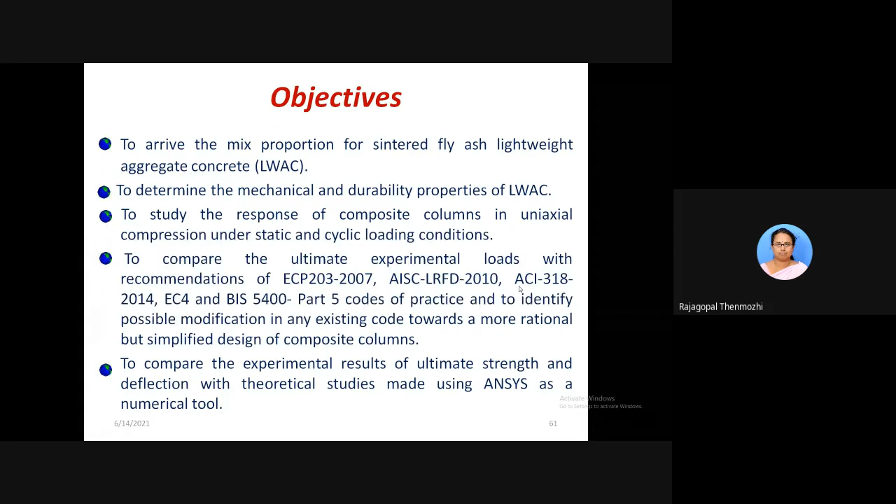This is the methodology adopted: problem identification, literature review, collection of materials, and formulation of mix design. Then the study was undertaken using composite columns, and these composite columns were tested experimentally, with the real experiments validated through theoretical equations and also numerically using ANSYS.

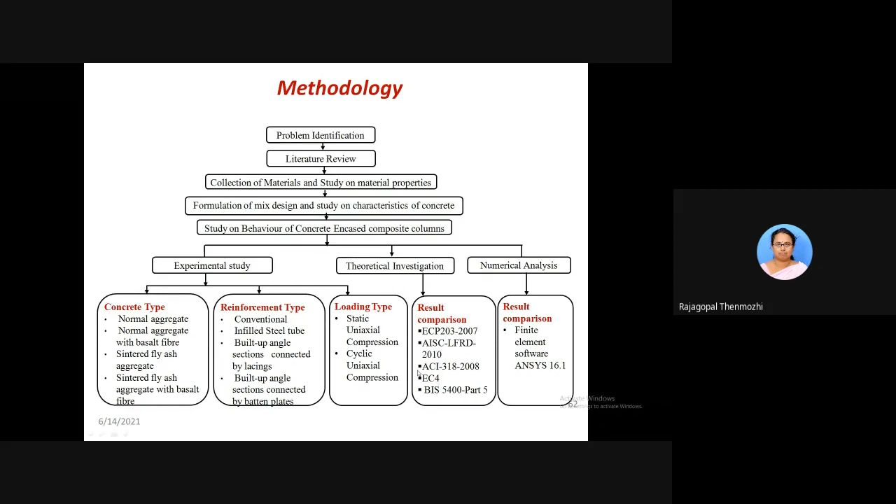As far as experiments are concerned, both the fresh and hardened concrete properties were tested, the reinforcement type and other material properties were examined, and the built-up sections were tested. The loading was static uniaxial compression and cyclic uniaxial compression. In theoretical analysis, these 5 different country codal provisions were compared, and all these were validated through ANSYS.

This particular slide will be useful to you on why you do research or get involved in research, especially for youngsters. You may wonder, what people normally do in many DC meetings is say this much percentage added, so that much percentage increased or decreased, or it is a failure, something like that. But while you do research, you concentrate on the physics and chemistry of the material you are using - because in the first year of engineering, why are we studying physics, chemistry, and mathematics?

Can any one of you say a few words about it? You can come up with certain comments, or if you feel any inconvenience, you can chat also.

No idea... yeah please, because we should know the basics of all the material properties, so it will be easy to design a new material.

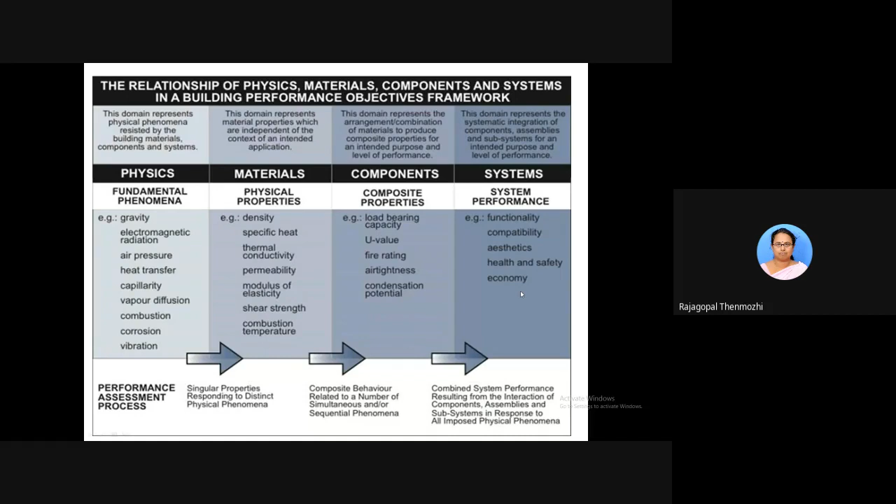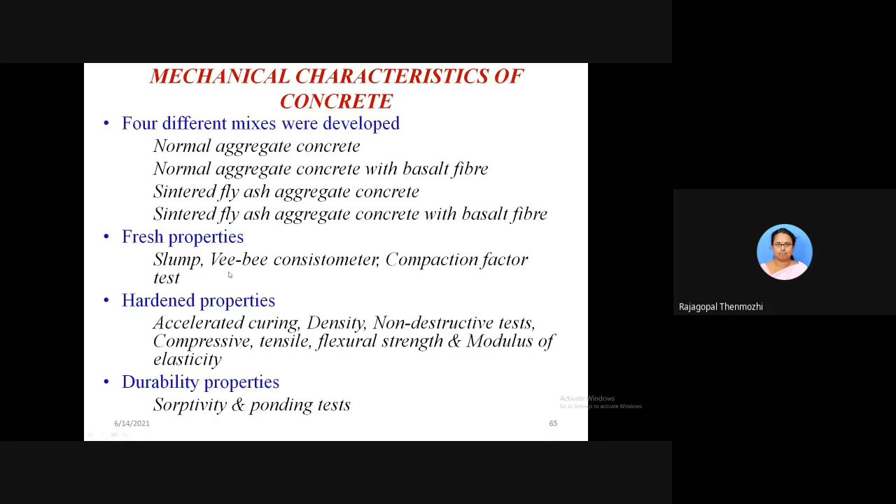Right? And once this is successful, then we transfer it to a system where we check the functionality, compatibility, aesthetics, health and safety, and economy. Right? So based on this the research lies. So coming over to the characteristics of materials. They have used 4 different mixes: normal aggregate concrete with basalt fiber, sintered fly ash aggregate concrete, then sintered fly ash aggregate concrete with basalt fiber. It did all the fresh and hardened concrete properties along with the durability also.

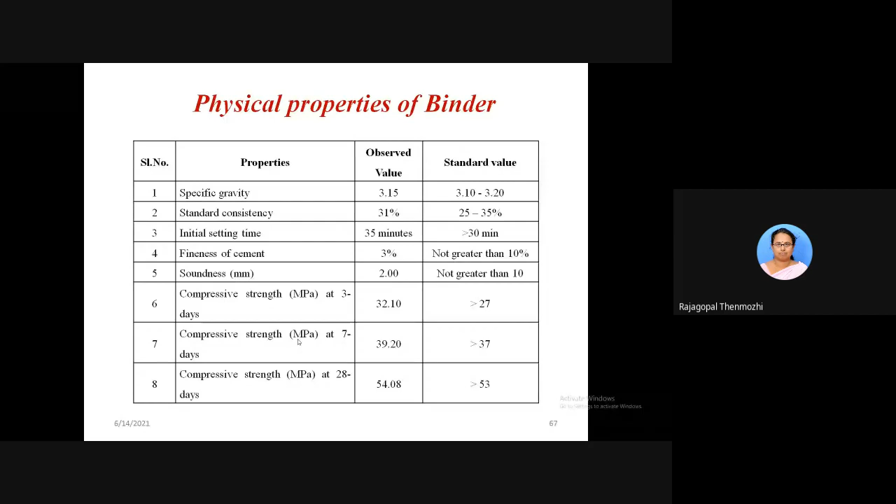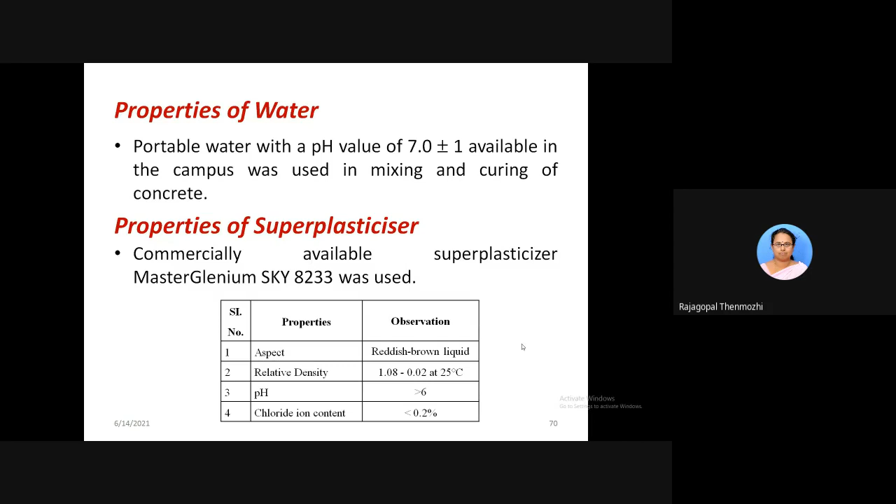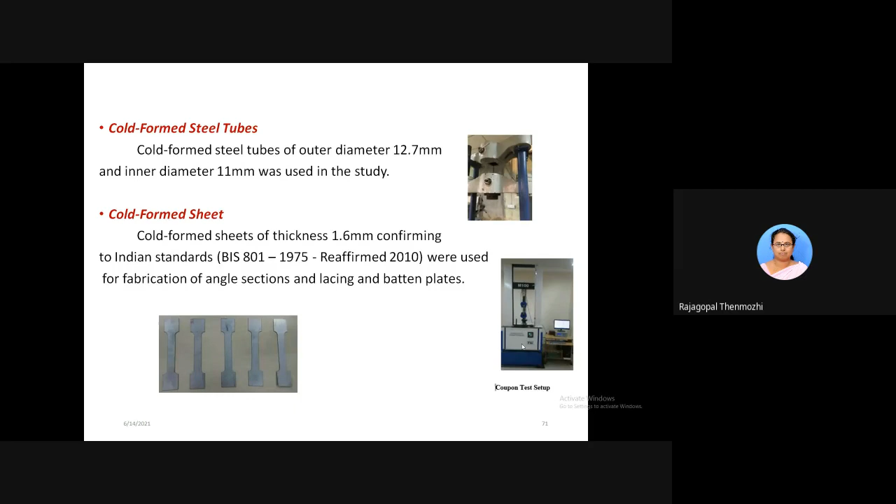So these are the properties of the basalt fiber and the properties of water and superplasticizer. What we have used is MasterGlenium SKY 8233. And as usual, before starting, we have to do the testing for the cold formed steel tubes and the sheet also, because we have used the laced and battened system using cold formed steel. As per IS 801:1975, which is reaffirmed in 2010, we have checked the Indian standards for the given steel.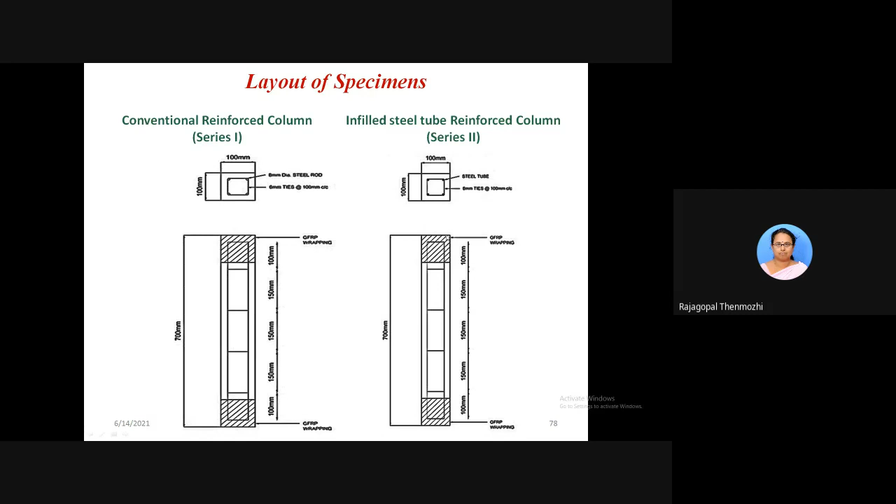So this is taken to this concrete encased composite column. So the concrete encasement is there inside the conventional steel here, right? And in some of the systems we have conventional steel, and inside, the steel tube is inserted here for this system. Whereas for the next one, the laced built-up reinforced column, and this is the battened built-up reinforced column of series 4. So this picture tells you about the conventional reinforcements, that is series 1.

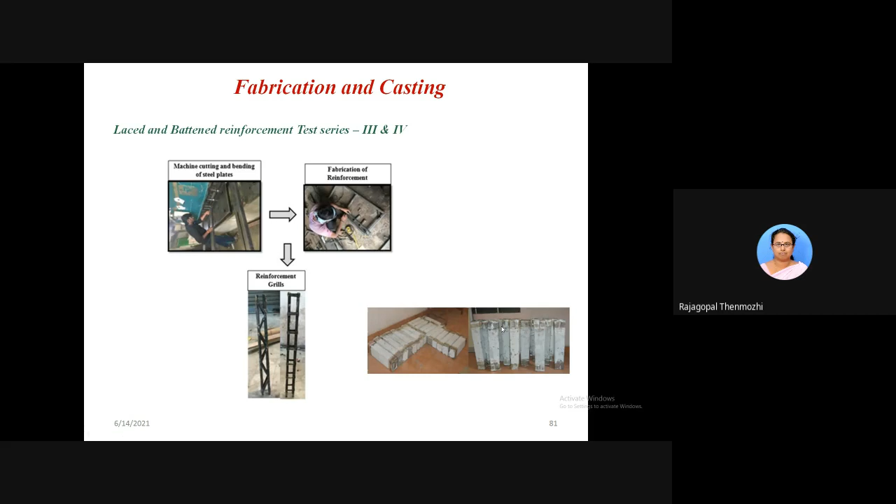And these are the angle sections and tubes. So here the machine cutting and bending of steel plates is there, and the fabrication of the reinforcement, from which the reinforcement grills have been made. So the first one is the laced system, and the second one is the battened system. These two have the longitudinal angle sections as the main steel. These systems have been inserted into the formwork, then concrete was laid, and finally it is tested for axial compression.

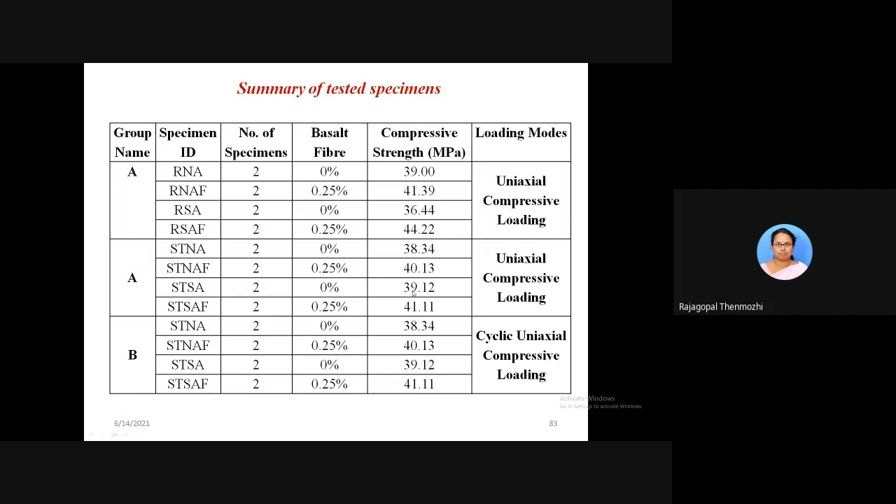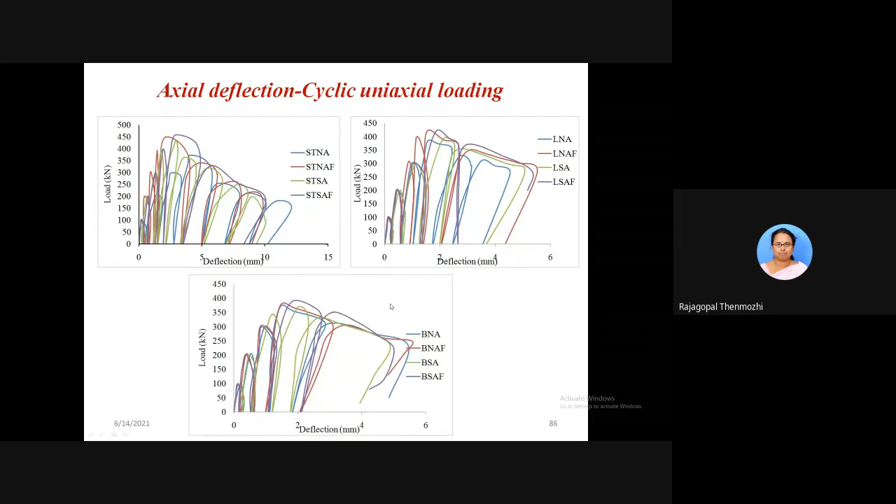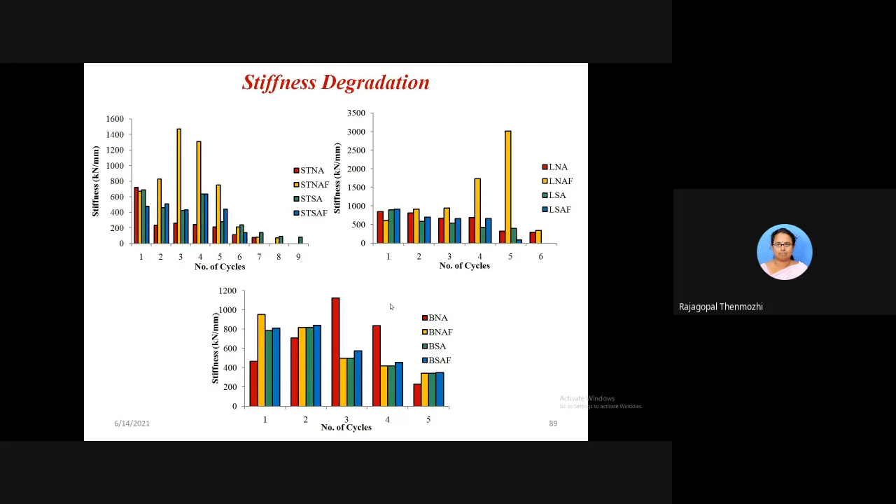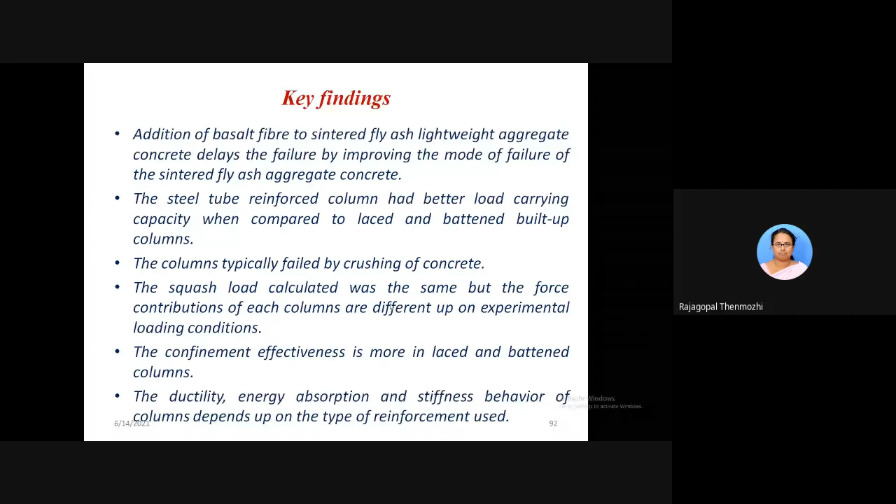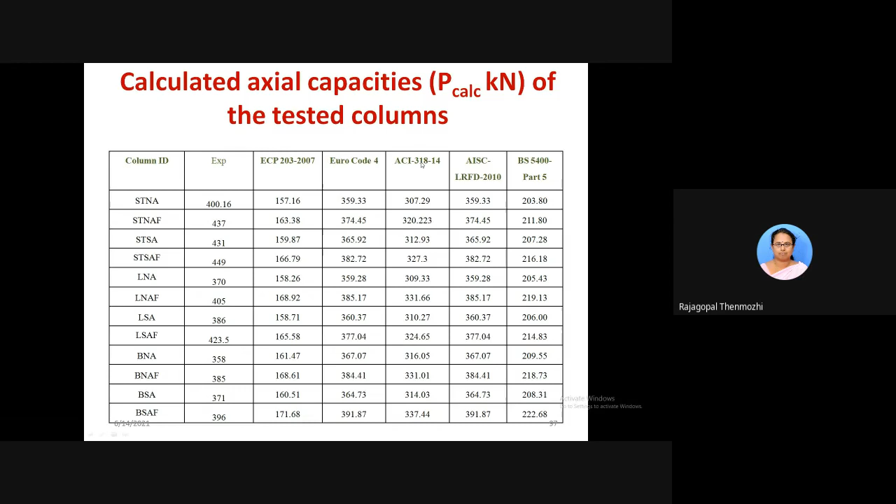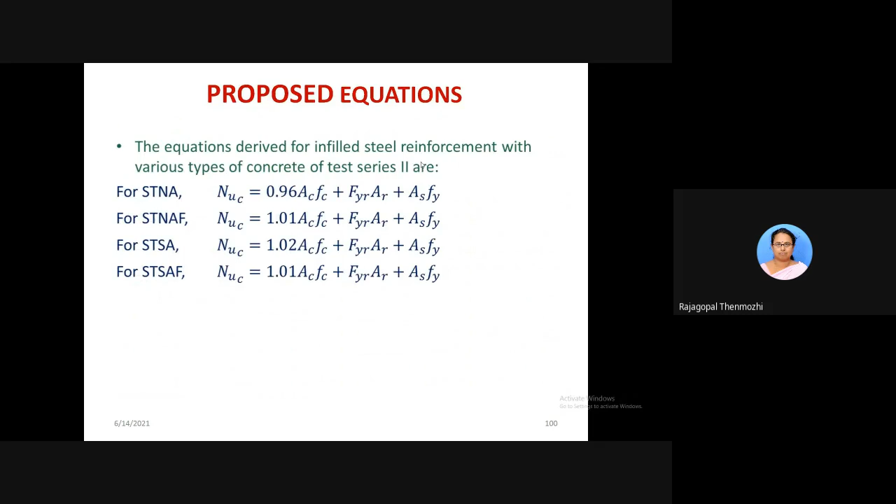We made a theoretical analysis as per 5 different country codal provisions, and those values have been compared. These are the experimental values. They have good coincidence with the Eurocode system, but the other codes are a little more conservative, so we got much difference in values. EC4 and the AISC LRFD standards projected very good comparability. ACI code a little lesser. But compared with the other codes, BS 5950 Part 5, BS 5400 Part 5 and ECP, the difference is much. So it agrees well with EC4 and AISC LRFD standards. The deflection values and ratios have been compared here. These are the theoretical proposed equations.

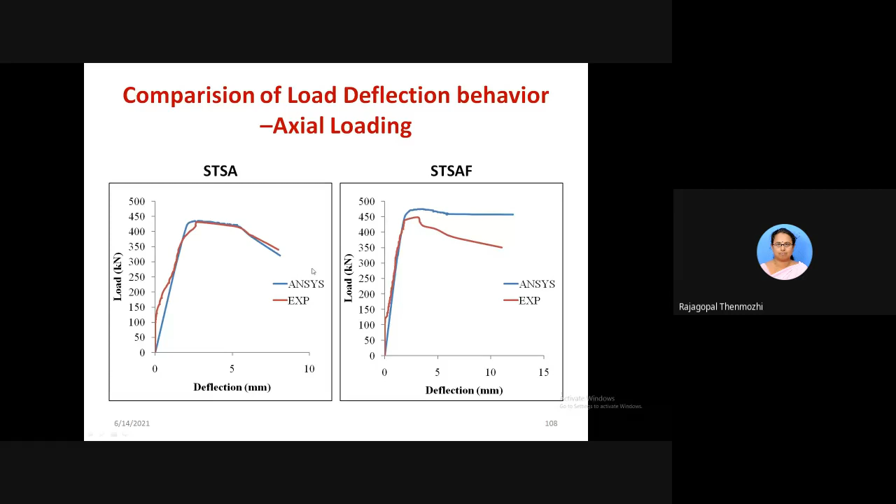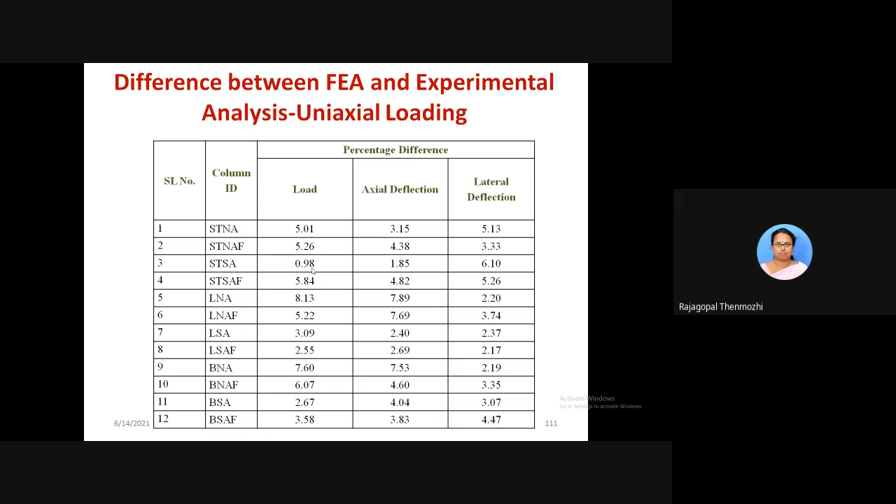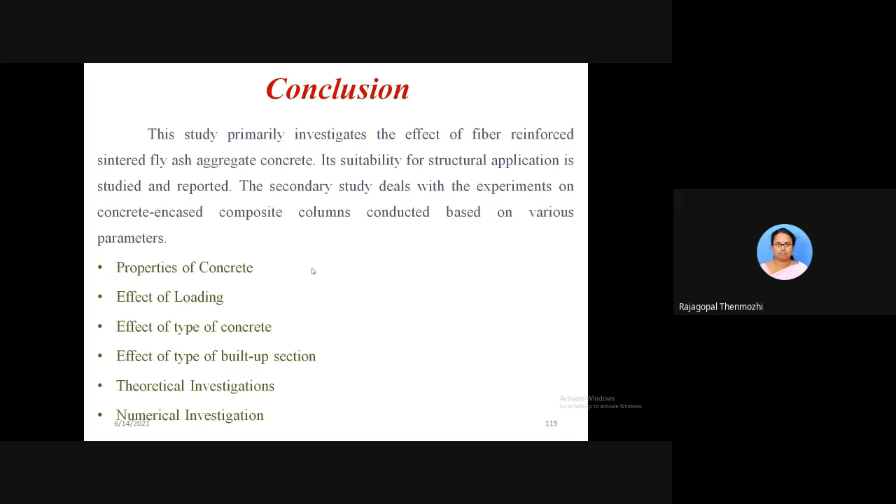So from which what we could conclude is the sintered fly ash aggregate can be very effectively utilized in any kind of structural system. So for composite system, encased concrete columns, we have adopted and we found the value, and we could get the same kind of mechanical properties as in the conventional system.

So these are the recommendations. So using the steel tubes and the built-up sections, we could get more values, so that the lacing and batten systems showed more stiffened results. Right? So the high strength lightweight concrete can be preferred for use in high-rise buildings.